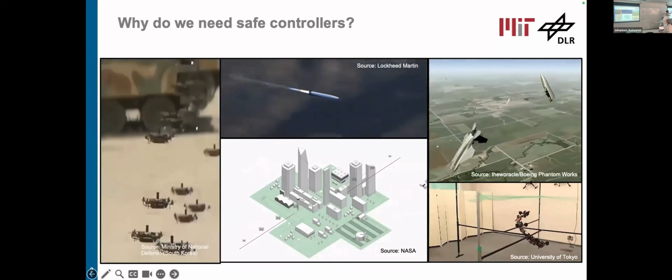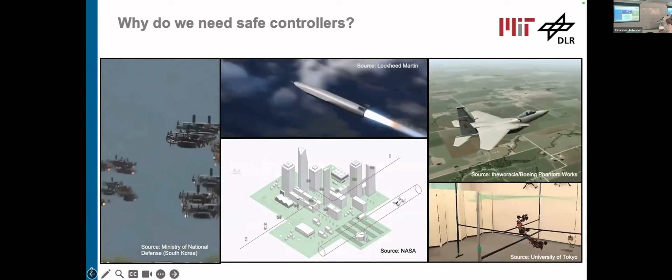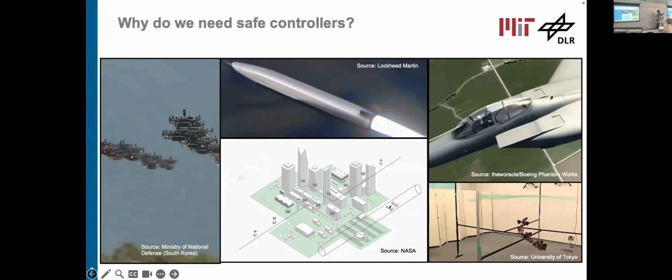A classical problem is coming here from Boeing, where they have a fighter jet with load constraints. You need to make sure that the load constraints are not violated, otherwise your system could fail. Also here on the lower side, you're seeing a small, very interesting snake-like robot which is trying to get through gaps, and that could also be somehow addressed through control barrier functions, or state constraints, and with that as control barrier functions.

And these are the motivations. I will, of course, not address all of those problems in general, but it's just nice to have this in the back of your head.

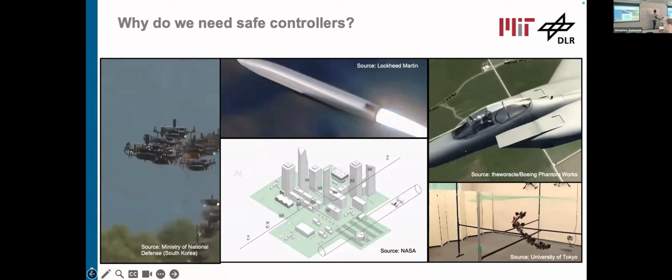The talk today will have basically three points or topics. Today I will first revisit and recap on the foundations of control barrier functions in a way that helps me present the work we have done in combining control barrier functions with adaptive control. And from there on, a very simple outlook and conclusions.

So the concepts of control barrier functions. We had the pleasure to have a very nice talk from Victor right in the morning, so he laid the foundations. Just to recap on this, we could imagine we have a nonlinear continuous system, control affine. And for this system, we could search for a continuously differentiable function h.

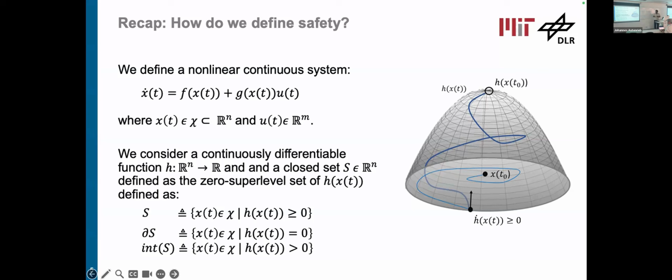Which is defined such that within a closed set, which we call S, like our safe set, the function is positive in a way that it's greater or equal when it's within the set. Meaning on the boundary, the function is 0, and within the safe set in the interior, it's greater than 0. And when we have this function, we can actually use it to enforce safety, and also this is nothing new.

We had it today already. So we have this constraint, this inequality constraint, which is basically saying we have this full term here is h dot, and we just need to make sure that h dot is lower bounded by this term here. And this term could be anything actually, so it has to be a class K function. And what we normally do is search for an exponential function, having an exponential lower bound.

What that means is that you choose this function alpha such that you have a parameter, call it gamma, call it whatever, it's a scalar, times the value, the barrier function itself. And with that, you get an exponential lower bound, and you need to make sure that your system operates above this lower bound. And with that, you're safe. And in general, the idea is to have a generalization of Nagumo's theorem.

So you need to make sure that the system stays safe in a certain way. And as Victor already talked about, this is the most popular way to do this, right? And how does this help us? We already had this also already today.

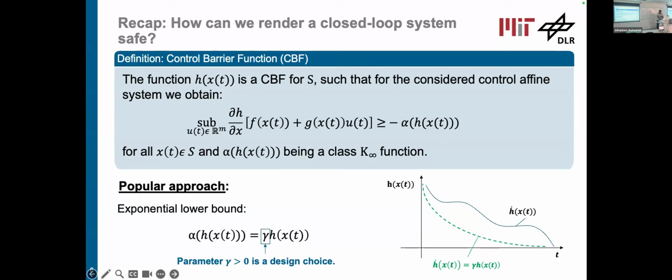So the idea of using control barrier functions is that you can decouple safety from performance, right? So you can now have a performance-oriented controller in the most simple way. It could be anything, so I just wrote down this. And normally you plug in this controller into your dynamics, could be the plant, and you're designing the controller with respect to performance, robustness, etc.

But in that sense, the controller is not able to provide safety, right? So what will happen is, for example, you could have a controller for a drone, and if the drone is not aware of surroundings or has no module that informs the drone of this, you will basically have performance guarantees, but no safety guarantees. So you will bump into a pillar that is right in front of you, right?

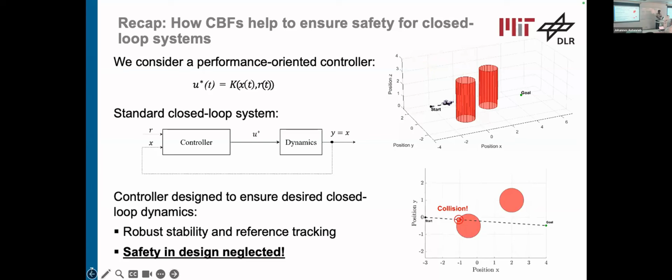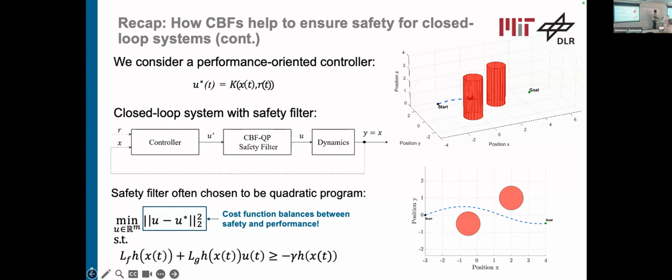When you use these exponential control barrier functions, you have basically one design parameter, which is gamma in this case. You have this scalar gamma, which you have to choose. And as the others talked about, this design choice has implications. Theoretically, you could choose gamma as you like, for a system without input constraints, for example. However, the world is not like that. Normally, the choice of gamma is also part of your synthesis, so you have to choose it properly, and it has implications on your actuators.

It also has implications on the way you render your system safe. So if you're choosing a conservative gamma, normally for a relative degree system, the lower gamma is, the more conservative you are. In the case of collision avoidance, the lower you choose gamma, the more far away you initiate your avoidance maneuver. And the higher you get, the closer you get to the obstacle. And if you would choose gamma infinitely high, you will actually impose Nagumo's theorem.

So you would just impose h dot greater than or equal to 0 at the boundary. So what you basically would do is, if you want to go there, you would go on a straight line. And once you reach the surface of the obstacle, you would scratch around to get to this point. So if you're very confident about your system and your actuators, you can choose gamma as high as you like. But if you're less confident and you have problems, you have to choose it wisely, and it will be interesting afterwards.

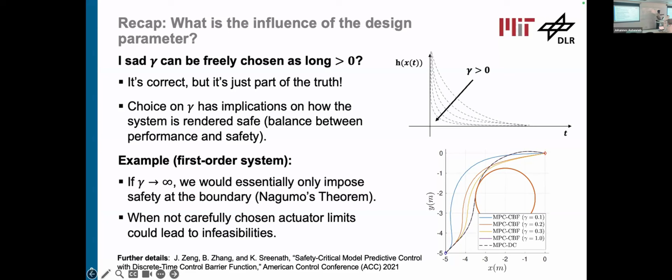Okay, so keep this in mind. Now I talked about mostly systems with relative degree of 1, right? What we also have to consider is systems of higher orders. And what that means is, if you're deriving your safety constraints and you have the derivatives, you have this term here. If this is 0, it means you have no control authority in the sense of safety, so you're not able to use your controllers to render the system safe.

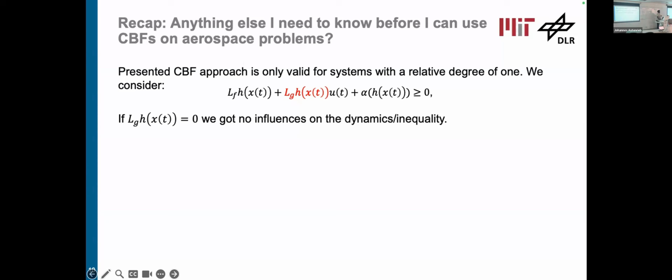So this means, hopefully just the problem of having a higher relative degree, and there you use higher order control barrier functions to have a backstepping-like approach to get your safety constraint, right?

So you start with the safety function you think is correct, or not correct, but it's the one that is helpful for the operation. Then you're having a recursive way of deriving a higher order control barrier function until you get to the point where this part is not zero anymore, right? Like backstepping. If your control input is showing up in the equations, you're good to go, right?

Then the last function you're using will become the input constraint, the inequality constraint you have to put in your QP program, right? It's a very simple approach, and it works quite okay.

Of course, theoretically, you have no guarantee that the one you're deriving is actually the real control barrier function of the system, right? But in a more heuristic, or let's say practical way, you often get to the point that it can practically ensure safety, in a certain area, and you have to be careful about it.

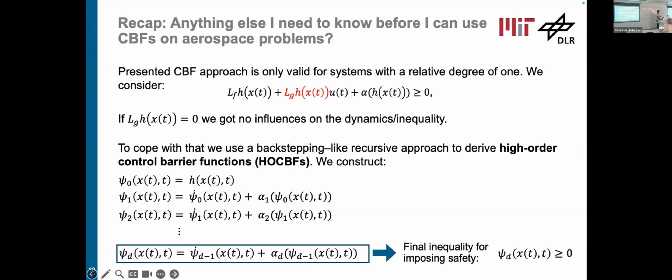What I mean is, if you look for example into a system which is familiar for us, we have longitudinal dynamics of a missile system, right? And here we're using NDI to control the system. So we're having an angle of attack command and a cascaded NDI controller that translates the angle of attack command into a pitch rate command, and from there you convert it into the surface deflection, right? This is how you would do it. I think most of us are familiar with how this works, so I won't discuss it too much.

However, if you do it this way, you could get to the point where your alpha reference tries to do something which is not valid or shouldn't be done by your missile system, right? For example, you have load constraints, and the alpha command you choose is actually, with respect to the operating point and dynamic pressure, leading to overload of the system, right? You could end up in a case where structural limits are violated, right?

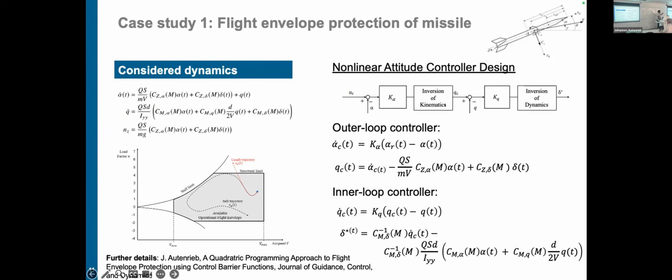Normally you would define such a problem in the flight envelope. This is what you're seeing here, right? Then within a defined minimal speed and maximum speed, you should be in a certain range of loads, and normally those loads are a function of the stall limit as well as the structural limit. You convert this back to angle of attack constraints, and you can actually use this to derive a control barrier function.

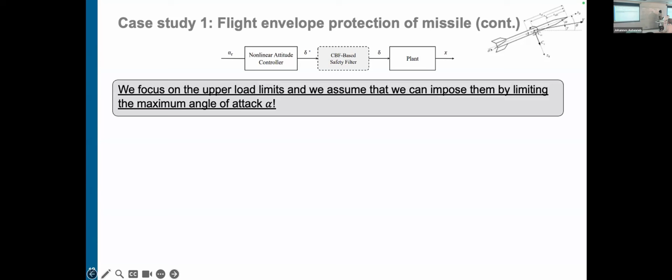So now I'll just focus on the upper limit, because the lower limit is basically the same thing, just on the other side. The easiest way would be to define such a safety function. It would be the straightforward control barrier function to apply.

From there on, again, the cookbook example, you're having this function as your first choice. You're having some assumptions on the constraints you're looking into. For example, you have alpha max, and you just assume that point-wise, this alpha max is constant. With that, the time derivative of alpha on this constraint is zero.

If you do this, you can derive the first derivative of this, and you still see there is no delta showing up, right? You just have alpha dot, but alpha dot is also not a function of your control surface deflection, when you have this as your exponential, like your alpha function.

Then you take one additional step, and you get to the point where you have alpha dot dot, right? And alpha dot dot is basically a function of your delta again, and therefore you've now reached the point where you have your system. Normally, when you have a second order system, you will get to this point, so you need two steps for this, which is basically the majority of aerospace systems.

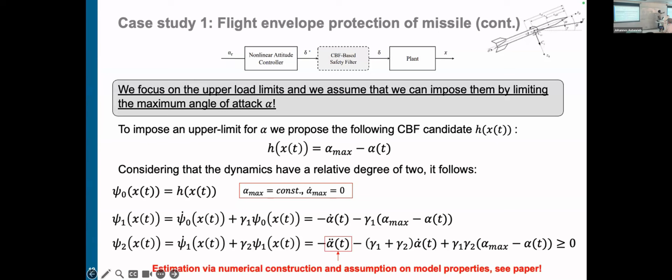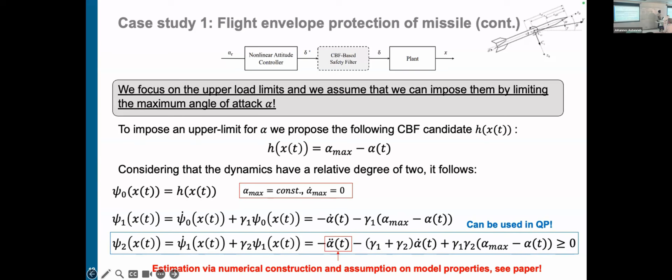And when you've got that, in this case you need some way of approximating alpha dot dot and rephrasing it to delta. But this shouldn't be that important for us right now. The more important thing is you get to the point where you can use this constraint, and again, alpha dot dot is a function of delta. If you know that, you can plug this into your QP, which you apply to the system.

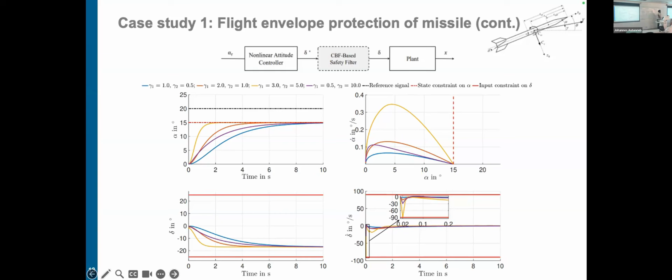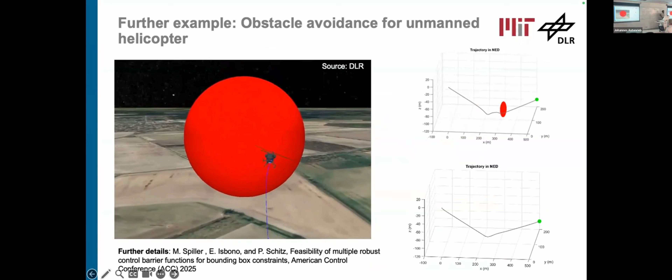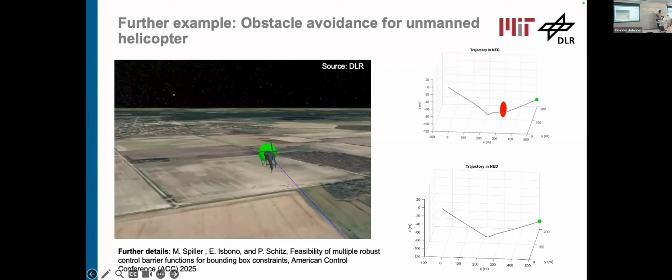This is one example, and there are further examples in place. This is from a colleague at DLR, who uses control barrier functions for collision avoidance of autonomous helicopters. There you see basically the same thing: higher order control barrier functions applied now to position constraints, which we had with others before. This works quite well, and these are robust control barrier functions.

This comes from the University of Michigan, from Dimitri Panagou and I think Joseph Breeden, where they basically found a way to design control barrier functions with input constraints for higher order systems. In this case, we applied it for cooperative missile systems.

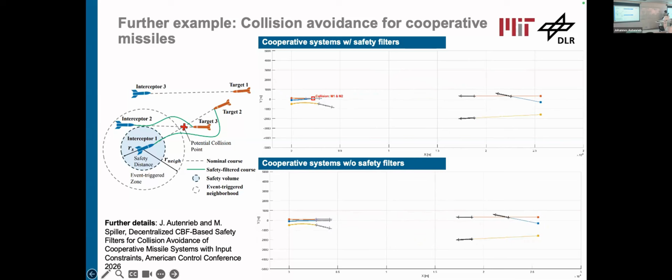So you have a performance-oriented controller, in this case simple proportional navigation guidance, so they're trying to intercept directly. At the same time, you have the safety filter that computes the relative velocities between each other, and based on that, tries to render the system safe. Those are roughly the concept.

When you have safety filters, there are problems. Actually, there are a lot of problems, and I think this is what keeps awake all the people who are working on this.

When you plug in the safety filter just after your controller, it's just half of the truth that you can just plug it in and think it's fine. If you have, for example, integral states within your controller, you could end up in cases where you have wind-up. So you need to be aware of that and probably need some methods to address this.

Also keep this in mind: if you have a robust controller with robustness guarantees, and you apply a safety filter right after your controller input, you can destroy your robustness guarantees. When the constraints here are active, the closed loop or the dynamics you have designed within your controller without a safety filter in the loop are not there anymore. So your guarantees are gone—keep this in mind.

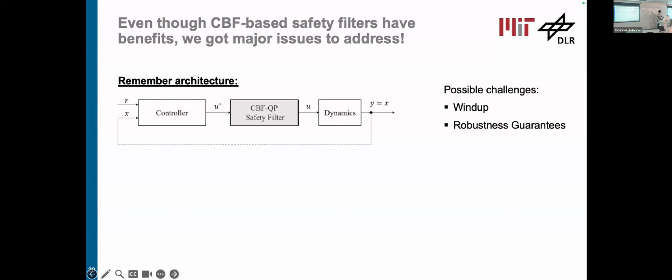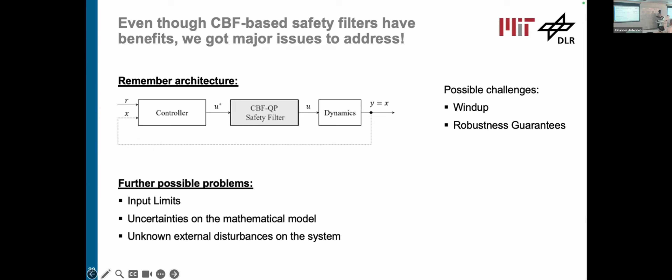So with that said, there are further problems. You have input limits, uncertainties in the model itself—the one you're using the safety filter for—and of course always possibly unknown external disturbances. The one I would like to address in the rest of the talk is model uncertainties.

In all those cases, your model is changing, and when the model is changing, it has implications on the way you render the system safe. I think this was also the message from all the folks who presented before.

You have different ways of addressing the problem. You could have a robust controller or a robust safety filter that has knowledge of what could happen in the worst case. You could have adaptive approaches, data-driven learning, whatever you name it, or sensor-based approaches. But in this talk, we talk about adaptive control.

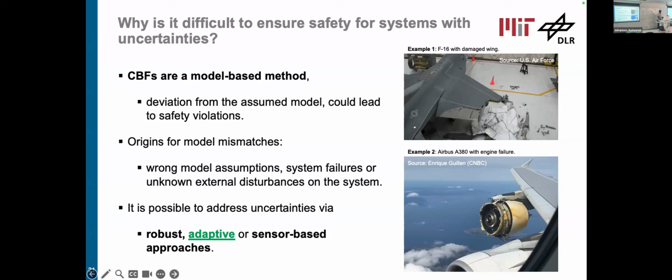For those not familiar with adaptive control, there are basically two classes. You have direct adaptive control, where you're directly adapting the controller—you have a controller with control gains, and based on what you observe in terms of deviation, you're adjusting these control gains directly. It's basically the same thing Anuradha talked about in her first talk.

So classical MRAC is mostly direct adaptive control, and you have indirect adaptive control, where you're trying to learn or identify the mathematical model or the parameters, and based on the learned parameters, you're designing or redesigning your controller on the fly. So it's more or less a model-based approach to control design. There are also hybrid approaches, but these are the big two groups.

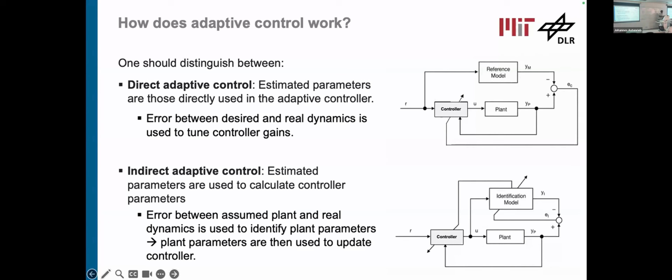For indirect adaptive control, it has certain benefits with respect to actually being able to learn the real model and your real parameters. But the problem is you need sufficient excitation, and if you don't have it, you get problems. So the guarantees are weaker because you're redesigning your controller based on the model, but if the model is not sufficient or close enough, those guarantees are not that good. And with that, you risk the problem of poor performance or instability.

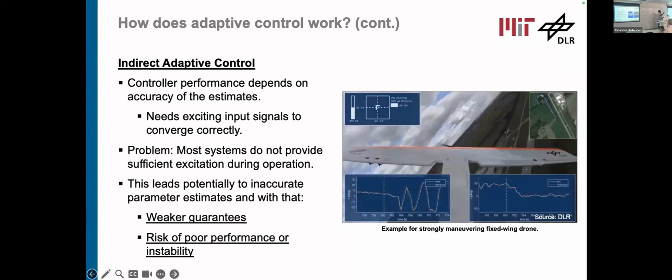So you need to keep this in mind—normally this is an issue, so you can't operate this way in most applications. Therefore, indirect adaptive control is not the go-to approach in aerospace. What's normally done and most popular in aerospace controls is direct adaptive control, because you don't have the strong need of excitation—so you can have stability guarantees without excitation and converge to local minima which are sufficient enough.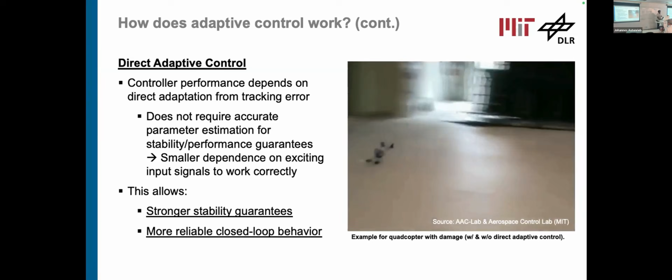In this case, you're having a drone that has the induced problem of the propellers being destroyed during operation, and you would like to ensure that the system still stays stable. In this case, they use direct adaptive control, and you can see that without excitation, the system is able to stabilize. This is the big benefit of using direct adaptive control, MRAC.

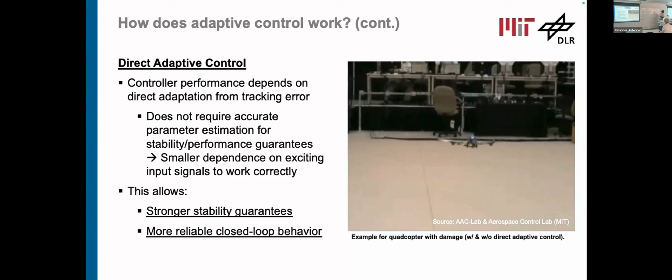So here again, I think you will see it. Without adaptive control, the system becomes unstable and just flies into the wall. With adaptive control, or direct adaptive control, the system stays stable, and actually just small adjustments are basically able to stabilize it quite fast. This indicates the performance increase, or the better performance of direct adaptive control in general.

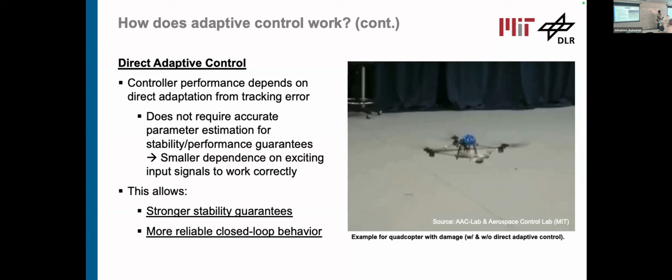Therefore, we just choose direct adaptive control as our go-to approach, okay?

And now we're getting to the point where we again are in the same problem as Andrea talked about. So we're having a plant, a linear plant in this case, and we don't need any knowledge of A_p. We have a lambda, which is the uncertainty on the input, but this is also partially unknown. It has a certain structure, but you don't know the value of it. Theoretically, you assume that there exists this type of controller where you have a feedback gain theta x star and a feedforward gain theta r star, applied as a controller to your system.

And if you assume this, the matching conditions come naturally. So this is something we're searching for. We don't know this, and we don't know this, and therefore we don't know this. So this is our task to address. The idea is to find such a controller, ensure stability, while at the same time ensure safety, and having all those real-time elements being active at the same time.

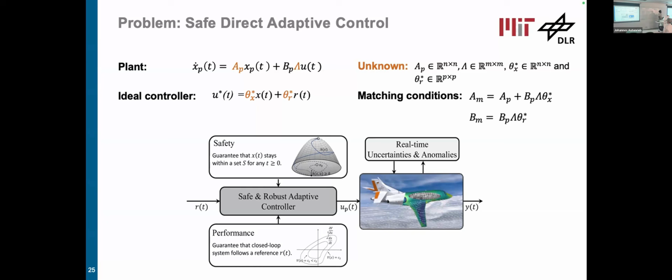I think I'll just go fast through this because Andrea was already able to address this in a very nice way. So we have this reference model, and again, this is our controller. Now we're trying to estimate the controller gains, the matrices, in real time.

And normally we use this kind of adaptation laws to get to this point. These are functions of our tracking error, the error between the reference model and the plant.

Yeah, I just have one question. So when you're saying that these are adapting, does it mean that it's the result of this numeric integration at one time, or is it that you have like a family of gains you are switching between?

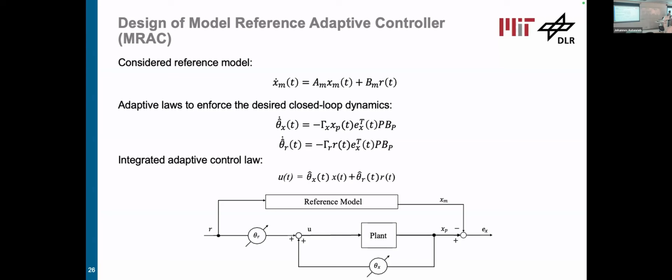But normally the idea is, so let me just switch over. You can use the Lyapunov theory, and having some candidate in place, with further knowledge, like using Barbalat's lemma, you can actually show that this is globally asymptotically stable. So you're able to show that the system will converge, and you will basically converge to the right gains.

So you will get to where are you, like theta x star, theta r star. But you need some things in place. You can prove that the error goes to zero when you have no persistent excitation. If you have persistent excitation, you can actually prove that you get to theta x star and theta r star.

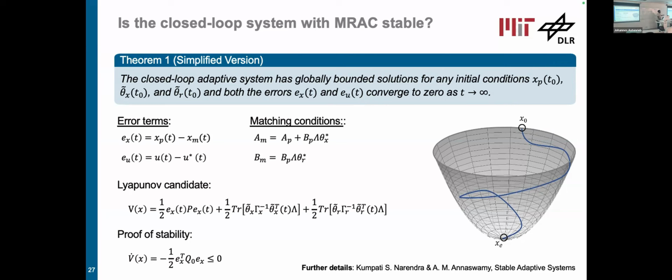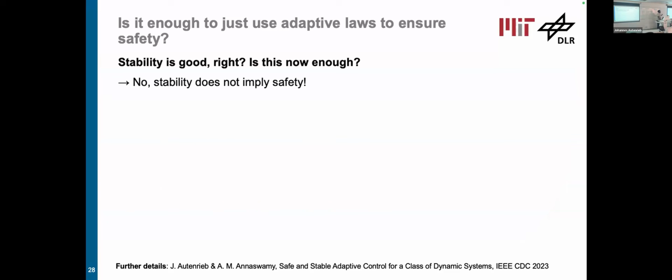But now with this, we only have stability proof. Is it enough for us to stay safe? And I guess we all know the answer: it's not enough, because stability doesn't imply safety. And we got two major questions to address: where to place the safety filter, and how to guarantee safety during the transient.

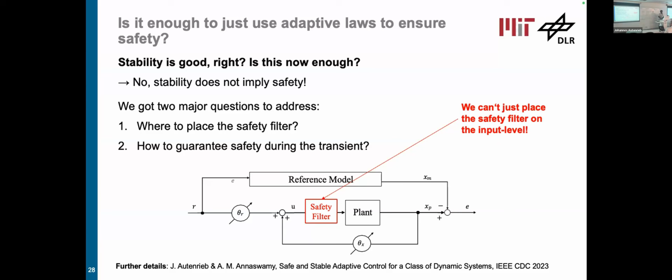So we propose a different approach. We are using the reference model and trying to use an indirect safety critical controller. So we have the safety filter here, and we're trying to render the reference model, the reference signal, safe. And with that, we're trying to make sure that the reference model stays safe. And then we're using our adaptation laws on an adaptive controller to make the plant or the closed loop system converge with the reference model.

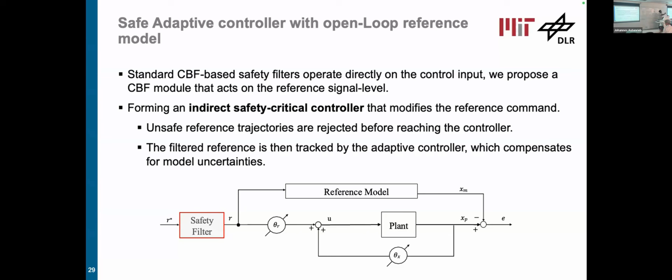And by that, we can ensure that once the controller is learned, you're having a safe behavior. Because if the reference model stays safe and your closed loop system is converging with your reference model and its behavior, you're staying safe. But there are some issues.

If you have a perfect plant knowledge and you don't have to adapt anything, actually you're good to go. So you could really say, I can render my reference model safe, and with that, my plant stays safe as well. This is actually working, but we don't have this. We have model uncertainties, and we have to get to the point that we have to make them converge.

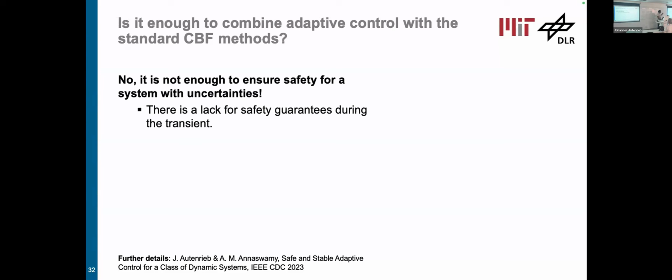And with that, during the transient, we have no guarantees. What will happen is that you can learn, and you could actually guarantee that the system will stay safe eventually, but during the transient, you could have the point that the system will escape the safe set. Because you don't have the right model knowledge, and you can't impose H dot on your plant at the boundary. So you need something more.

And the simplest approach to do this is basically having a safety buffer, this. This is the simplest approach actually. And you just need to make sure that this delta, this positive scalar constant, is chosen such that it makes sure that the worst case error, the worst case mismatch between the reference model and the plants, are captured. And if you do this, you could actually ensure safety.

So the idea is very simple. You're just saying, okay, if I know that I'm having a certain maximum mismatch, I just need to take this mismatch, put it in between, and use it as a cushion. And then you're operating with a subset, and this subset is, if you choose the delta correctly, guaranteed to be forward invariant. This is a very simple approach.

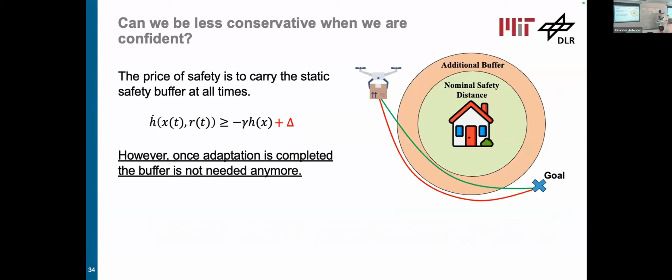From a performance point of view, this is not helpful. So our intent is to learn the model, but if we have learned the model, we can actually be more confident, and I should try to get rid of the safety buffer. And this is our approach. So is there something we could do to make this delta go away once we've learned the model? The first shot was to use this properties of gamma.

You remember, like this tuning parameter and the control barrier function, which actually implies how the system is rendered safe. So we said, okay, actually we could make this gamma a function of an error, a safety error, which is the difference between your nominal system and what you actually experience. And this function is basically just a tracking error. So if we're doing this, maybe there is a way to make the system safe in a more elaborated way.

So the idea is to say, okay, we have a radial basis function, and whenever the error is non-zero, the value of gamma decreases. And what you actually do is that you're having a dynamical estimation of your safe set, and you're adjusting the safe set dynamically based on the error you experience. And this is what you're doing here. We called it error-based relaxation.

And Jose applied this to swarm, like multi-agent cases. In this case, he had a problem of having small agents that try to get to those spots while they are maneuvering beforehand, trying to get to the spots, but at the same time there are obstacles. In this case, you have systems with model mismatches using only control barrier function, and you see this one is hitting the obstacle. And there you have the system only with adaptive control, and you see also one of them is hitting, which makes sense, right?

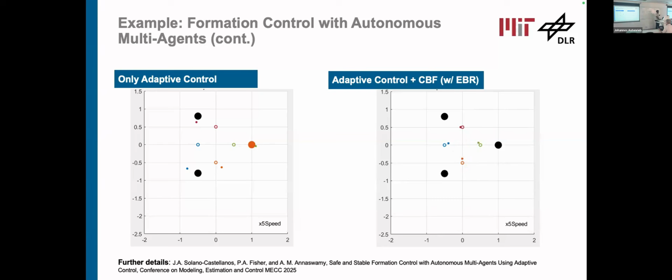And we went further and defined an error-based safety buffer. So the idea is, okay, we still have a safety buffer, but this safety buffer is only needed as long as the error is non-zero. If it's zero, we can get rid of it. And therefore, let's make this buffer a function of the error.

And we can actually show that for certain formulations, if you have model knowledge, you can prove that such a formulation is actually guaranteed to be safe. You need to have some knowledge on the dynamics, so you need some Lipschitz constants on the dynamics. But if you have that and you are able to estimate the worst case error, you can show safety.

There is one caveat for the safety buffer approach: we are able to prove that this is guaranteed to be safe on the unforced dynamics if you have uncertainties on the unforced dynamics. But if you're having uncertainties on your input, it gets more complicated. But we could have input uncertainties, so control surfaces could be damaged, actuators could not be working. So this is something we should try to address as well.

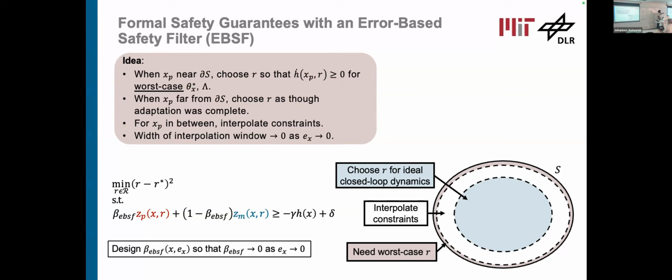You need to have some knowledge on the worst case error, and some knowledge on the dynamics. But if you have that, you can actually ensure that, and this is done there. And in this case, then you can provide safety guarantees. But it's somehow also still like work in progress.

So here in this case, Peter showed that actually it has benefits to the dynamics. So here we have a planar point mass, spring damper.

So you basically have the point mass, right? And it should try to follow a trajectory, but there is an obstacle in the middle of it. So this is the simple case, and we compared it here with different adaptive control barrier function approaches.

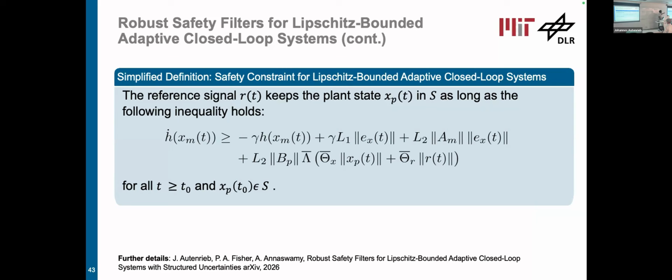You actually get a nice way of guaranteeing safety. So for this approach, you would need certain knowledge on your system. But if you have that, you can easily show that you can provide safety guarantees if, again, you have knowledge on L1, L2, and the bounds. It's also a very straightforward way, because if you know them, you can go straight forward and apply a safety filter, which is much simpler, but it's also just a second order cone program.

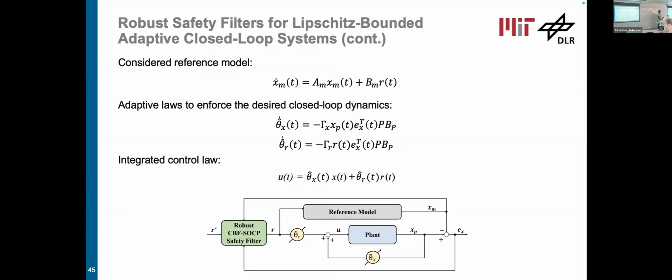Now you're flipping the book and going from a QP to an SOCP. But the benefit is now you have a lean way of looking at the problem. And actually, this is the only difference. Now you have an SOCP, and with this, you can apply it into your adaptive control problem. So these are the things we have seen before. And yeah, with that, you can provide safety.

Any questions about it? No, right, it's late. Okay. Yeah, but again, these, yeah, you have a question.

So the proof depends on the bound of the E. And how do you actually obtain this bound? It's through simulations. So what we've done is, if you know you have a certain way of uncertainties, you could go into the simulations and apply the worst case problems, or maybe make a Monte Carlo simulation and see what is the worst case that could happen. And you're using this E, or this capital E, and put this, for example, as a safety buffer, or also your knowledge on the norm. So this is the simplest approach, I would say.

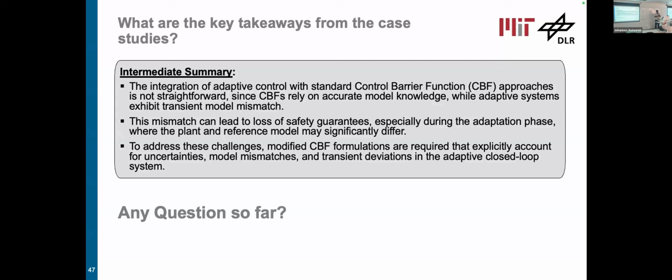Another question: it's very interesting to see you put this safety filter on the reference. Is it imposing the safety condition on X_M or actual X_P? How do you transfer this? Yeah, the thing is, like, you know, if you do it like this, can I switch over? Give me a second. So the basic idea is...

So if you do it like this, you actually try to impose safety on XP through XM, and it works when you learn the system, right? But if you're in a transient, it's not working. It's basically like trying to make an approximation of your plant models through a reference model.

So I see this is more like you're putting the conditions on XM. And you want XP to actually follow the XM. Exactly, and you need some sort of guarantee that XP actually follows. So you have the guarantees once you've learned the dynamics, the gains. In the transient you don't have it, but then you're trying to choose.

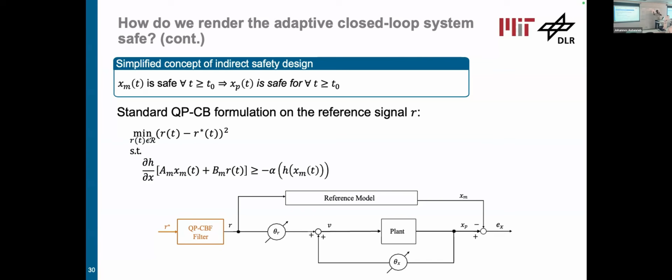You need to search for functions that add a buffer such that you still stay safe. So the basic idea is: I have my EH, which is a function of the various values for each of them, and there will be a maximum value. Because of the stability proof on the X, you can figure out through Lipschitz continuity we have a bound on EH, and the bound would be capital E.

And then you just need to make sure that H of XM is always greater or equal to E. This is the safety buffer you apply. But again, if you learn the model, you don't need it anymore. So you have the bound, but you also need some guarantee that this bound will disappear. That's the idea.

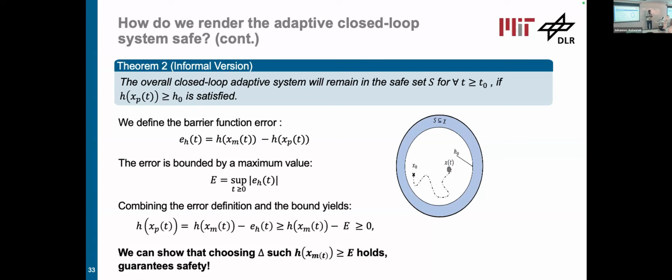Give me a second, I'll just...

So, outlook and conclusion. I don't want to take too much time. The outlook is we're now at a point where we're able to apply adaptive control approaches to single systems. If you have multi-agent systems, the problem becomes quite nasty, because now you have a chain of uncertainties affecting each other. Each uncertainty for each system may lead to a wrong decision at a certain time step, which has implications on how the other systems remain safe.

And it becomes more difficult if you have distributed or decentralized systems, where the safety filter applied to each agent doesn't have full knowledge of what the others are actually doing. So it's quite a nasty problem, and we're trying to have a look at this.

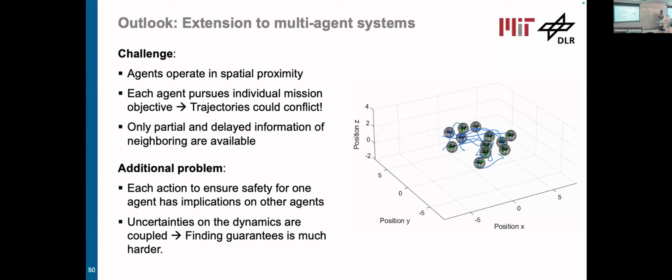Another thing is, for the stuff that is already theoretically developed, we're trying to apply it to different problems. We're currently working to apply it for hypersonic systems, and there's already work in place for this drone system. So this is something we're doing in the future.

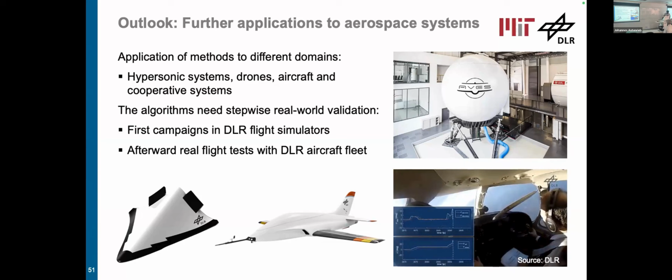Further down the line, the idea is to implement everything into a flight simulator and make actual flights on aircraft simulators, and in the final step make real flight tests with the research aircraft we have at DLR. With that said, I think everything is said and done, so I don't want to take too much of your time.

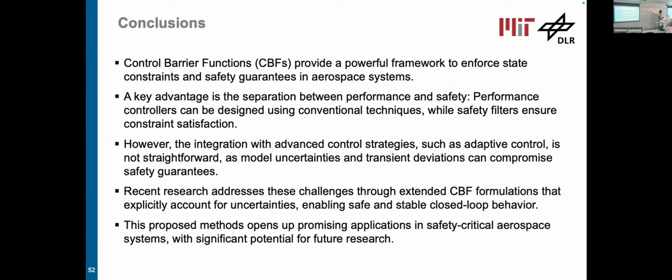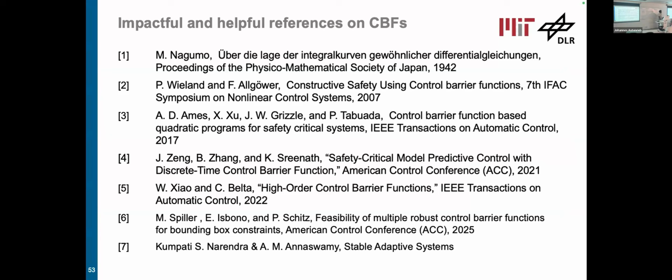There was one of the first papers that introduced the ideas of control barrier functions. Ames really laid the foundation afterwards, and there are some really good works from Wei Xiao, the lab of Sreenath, and also from Mark, who introduced topics on robust control barrier functions and foundational work on safe adaptive systems, plus work from my collaborators and me. Have a look at this if you're further interested.